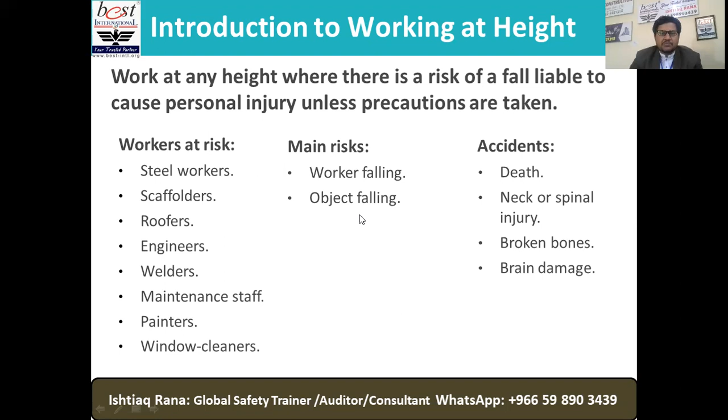Accidents, as I mentioned, the biggest reason of fatalities, like death, neck or spinal injury, broken bones, even brain damage - these are the accidents that could happen because of working at height. We require a very strong prevention and protection system. So vertical distance - falls from any height can cause injury.

Now here, before I discuss further the NEBOSH theory, what's your take on it? If a person is falling from 100 feet and a person is falling from 6 feet, what would be the impact? What do you think would happen to both, the effect of that height? What is your logic - who is going to die as quick as possible, God forbid?

I repeat again: a person falling from 100 feet and a person falling from 6 feet, God forbid, what terrible consequences would there be? Because falls of less than 2 meters can cause death or major injury. As per NEBOSH theories, falls of less than 2 meters can cause death or major injury.

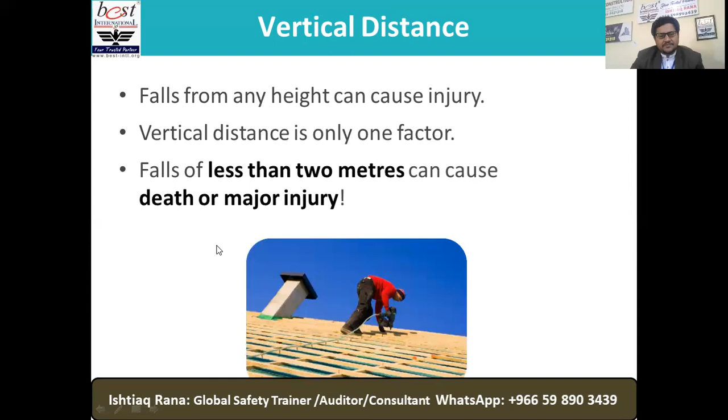Vertical distance is only one factor. Falls of less than 2 meters can cause death or major injury. Several injuries have happened just from a person slipping, falling down, and dying. That means the sudden impact on our body is really hard to bear.

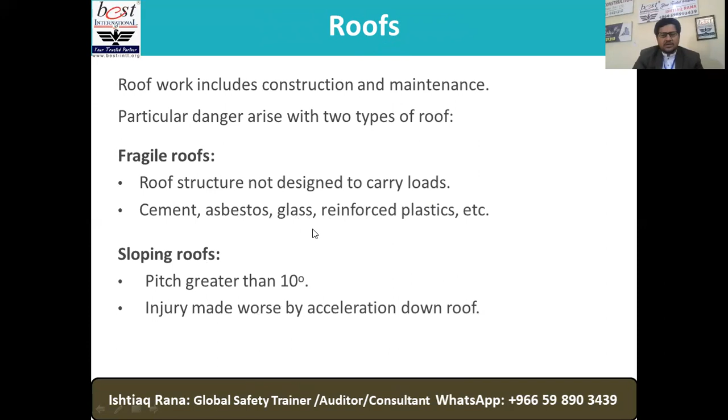Now the roofs. Roof work includes construction and maintenance. Particular danger arises with two types of roof. We have fragile roofs, like a roof structure not designed to carry loads - cement, asbestos, glass, reinforced plastic, etc. And sloping roofs, with a pitch greater than 10 degrees - injury made worse by acceleration down the roof as well.

So fragile roofs and sloping roofs we have. What are the risk factors for working at height? Deterioration of materials, unprotected edges - that is why while we erect scaffolding we have toe boards. Why do we have toe boards? The reason is we don't want any material to fall down, or even a person to slip off the working platform. Unstable access equipment, and also weather - that is why above 65 kilometers per hour, even the scaffolding could be in a danger zone.

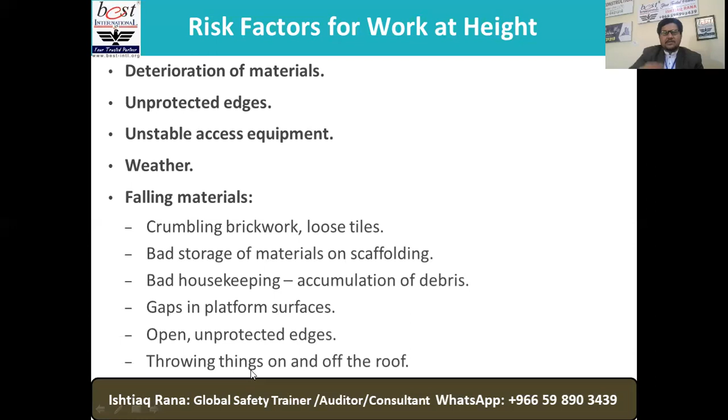Now, falling materials - crumbling brickwork or loose tiles - these are some examples of how materials could fall down. Bad storage of materials on scaffolding, even bad housekeeping - the most neglected area I've noted, especially in the construction industry as an auditor. The accumulation of debris, gaps in platform surfaces, open unprotected edges, and also throwing things on and off the roof. Sometimes you say 'catch it' or just throw it, and it hits someone.

So that is what we have discussed. What are the hazards of working at height for a window cleaner, and what is the most effective way to reduce the risk? Now it's a kind of practical discussion. Imagine you have a window cleaner - discuss what hazards are going to be there, and how you will reduce the risk. What kind of precautions or safety regulations will you implement? A person is working at height as a window cleaner.

What would be the most effective way to reduce the risk? Over to you, please.

Yes, anyone voluntarily, please. Yes, Mr. Muhammad, the worker or an object falling from suspended platform. Assalamu alaikum. Good morning.

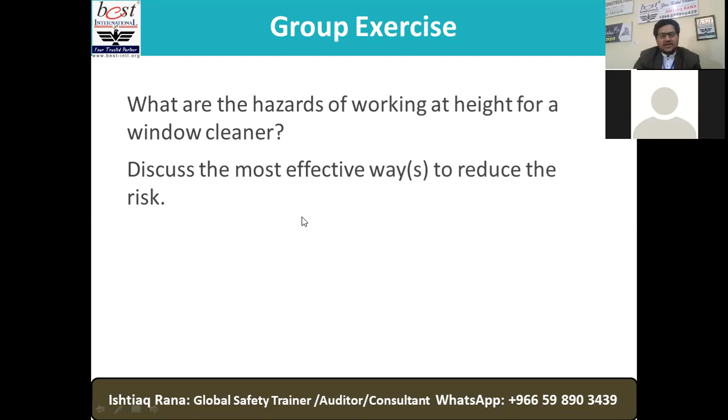And sometimes even the distance between two planks is more than 1 inch, and they have no idea how it could impact. And sometimes the toe boards, the platform, is disturbed because of poor material or poor erection, or not erected by certified competent employees. So several reasons we can highlight.

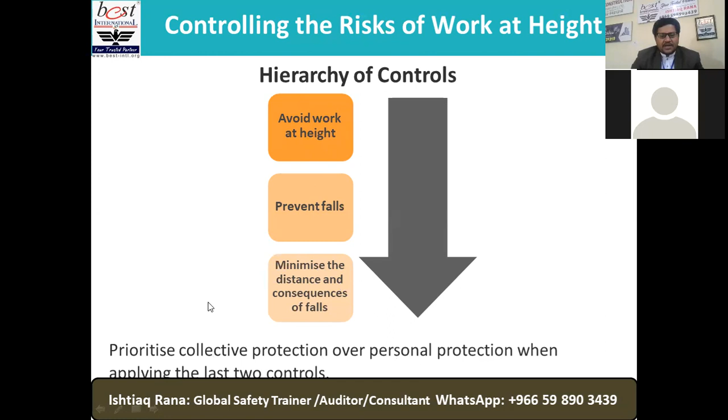Let's see, it's a game of hierarchy of control. First of all, avoid work at height, that would be the best strategy. Prevent falls or minimize the distance and consequences of a fall. Prioritize collective protection over personal protection when applying the last two controls.

Avoiding work at height, what we're going to do is modify the work process, work from the ground level, modify a design like the design of a structure so that steel is assembled at ground level and then lifted into place. It may not be possible to achieve also.

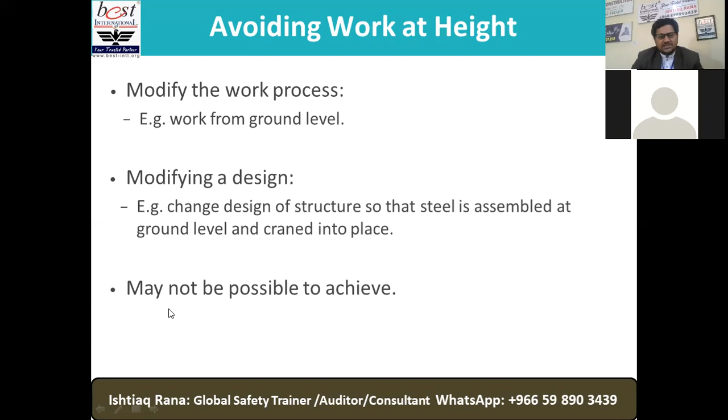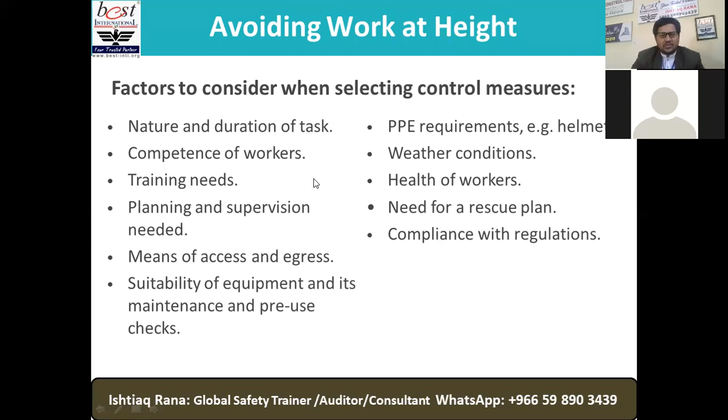So nature and duration of task, competence of worker, training needs, planning and supervision needed, and means of access and egress, and also suitability of equipment and its maintenance and pre-use checks. PPE is a requirement like helmets and weather conditions, health of workers, need for a rescue plan and compliance with regulations. It's not like immediately you're gonna allow someone to start working - a lot of regulations you have to follow.

Preventing falls and falling materials - the best way is proper planning and supervision of work. A poor plan, ineffective plan, incomplete plan, or a plan made by an incompetent planner, things could definitely go in a wrong direction. The probability will go up because your plan is not completed or effective, or maybe not executed the way it should be. So proper planning and supervision of work is important to prevent falls from height and falling materials.

Same way, the people responsible for such work should be experienced and should use their knowledge to ensure the selection and use of correct access equipment. They must be capable, knowledgeable, and experienced to select the correct access equipment and also correct provision and handling of tools and material. Adequate information, training, instructions are still required, even though they are experienced, but project to project, location to location, the nature of environment even would be different.

So we required refresher kind of instruction and training. That is why we have toolbox meetings also - that is another way to give some better insights. You can consider toolbox meetings as a training session as well, but it all depends what exactly you're talking about. It is directly linked to the project or the processes, or you are just talking here and there. So if it is specific to the process, even that toolbox meeting, you can make it effective like a training session.

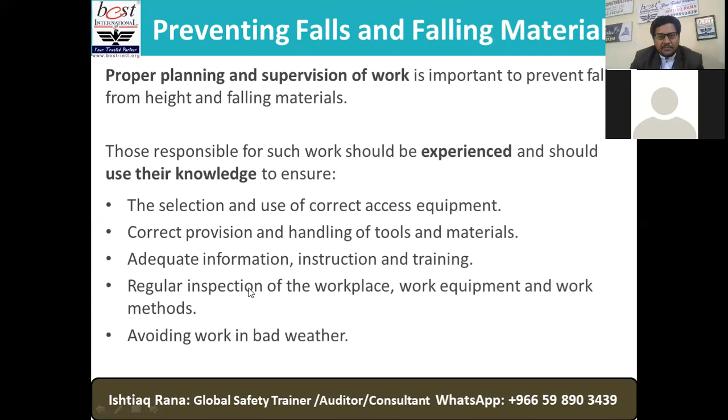Preventing falls and falling materials - look at the picture. Falls hierarchy, you require a safe working platform, properly installed suspended access equipment, and also equipment to arrest falls and falling materials like fit toe boards and brick guards. If risk remains, debris netting and covered walkways can also be used.

Guardrails and toe boards, fully enclosed unprotected edge - these are the toe boards, and also the guardrails. The guardrail, intermediate rail, the height is also important.

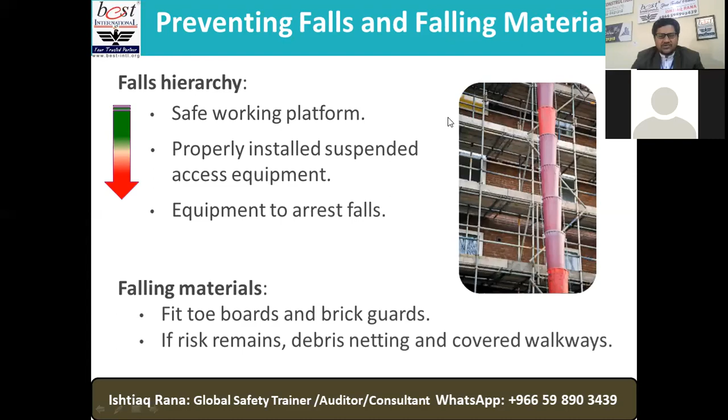Starting from the sill board, sole board, then standard post, and different kinds of materials we use just to complete our good erection of platforms, guardrails and intermediate guardrails and toe boards and working platform using the plans. Everything technically needs to be sound, in line with international standards. Like guardrails - make sure they are fully enclosed, the unprotected edge and robust, securely fixed, high enough, no large gaps. Toe board fitted at edge and brick guards.

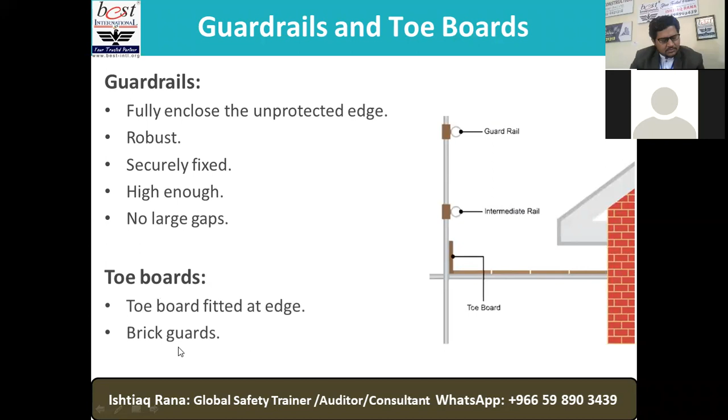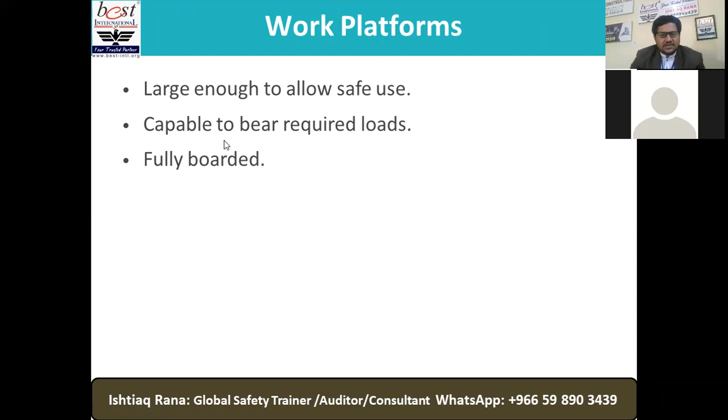Now, work platforms: make sure they are large enough to allow safe use, capable to bear required loads, and fully boarded.

Suspended access equipment, look at the picture also. Fully guarded toe board, and also personal suspended access equipment like boatswain's chairs or light short-term work or similar control to abseiling.

Even though a lot of protection methods are applied, a lot of incidents still happen because there's always a chance of failure, due to bad weather or the person not being in full senses, working 12 hours which is equal to 43,200 seconds.

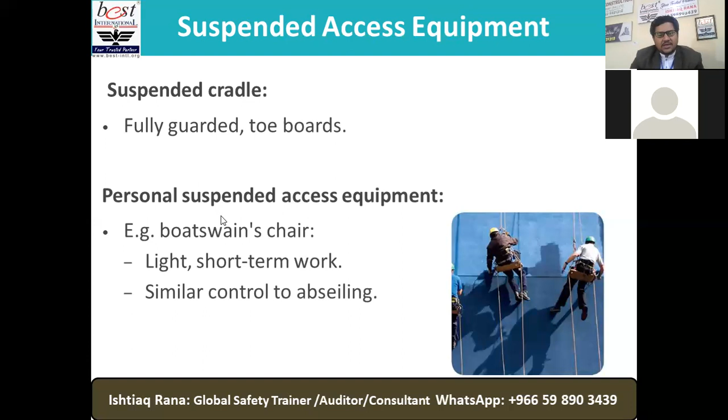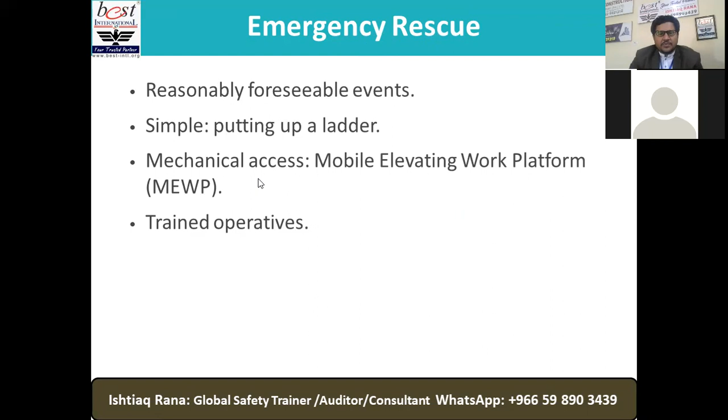And in which second his mind is not focused on the job, we never know. Emergency rescue, reasonably foreseeable events. Simple, putting up a ladder. Mechanical access - we can use mobile elevating work platforms like MEWP, and make sure trained operators or operatives are there.

No doubt, scaffolding erection is done by competent, experienced, and highly skilled employees, but on the other side it is also inspected by the supervisor and the scaffolding inspector as well.

But still, as a safety officer or safety leader, we still have to verify how far the scaffolding is from electrical systems, what is the overall condition of that scaffolding, the material, the angle of the scaffolding, and whether the way it is erected is in line with safety standards.

So what I mean is, sufficient knowledge is still required to verify that nothing will go wrong, God forbid. If there is anything unacceptable, you can easily stop them, and that is your authority also.

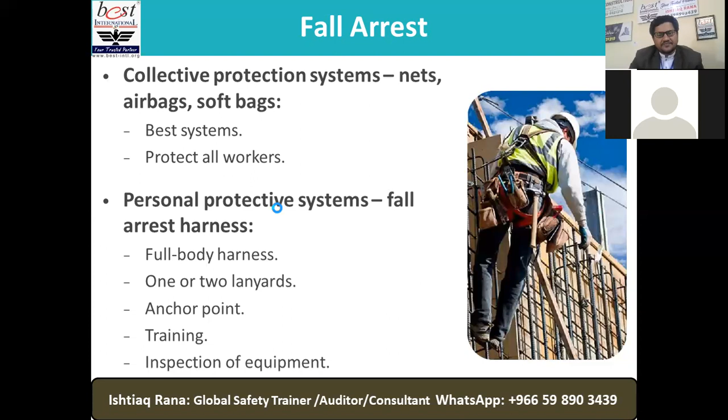Now, provision of equipment, training, and instruction - make sure workers are trained to work at height safely. Some companies call us only for separate working-at-height training, one day or maybe two days, theory as well as practical. So why do they call for separate training?

Because they don't want to see any terrible accident. Some companies call us not to train the welding process itself, like technical training, no - they call us for safe welding, safe welding operation. Some companies, I still remember, called us only for safe forklift operation.

So just the word 'safe' is added - safe abrasive blasting, safe painting, something like that - just to give them some kind of understanding about the safety regulations or rules relevant to that particular process.

So accordingly, I'm sure in Sadara you guys have very deep training programs internally to train your technical staff, because technically they are sound. Like a welder knows really well how to weld, but how to weld safely, or what safety regulations they have to follow - this is our part, to train them properly.

Because we can't be technical in every sort of process. Even if you have safety process engineers, it would still be harder for them to be excellent in each process of the company's operations. But at some level, they can train for the safety regulations of that process.

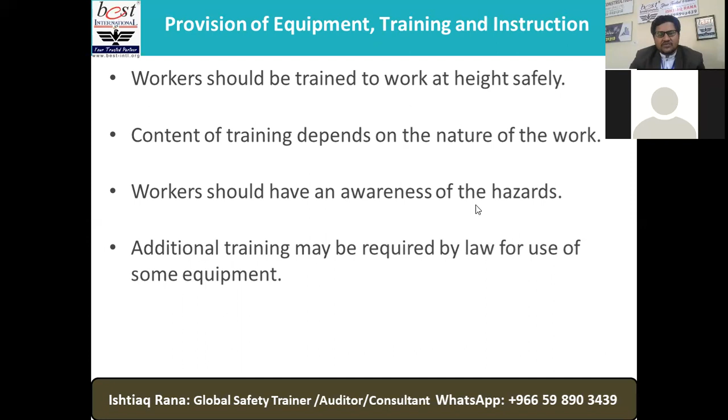That is why the workers should have an awareness of the hazards. Additional training may be required by law for the use of some equipment.

Now, we use ladders for intended short-duration work. The risk again is fall from height - falling off the ladder, the ladder toppling sideways, or the ladder base slipping out because the foot is not secure, or maybe the way he's using that ladder is not good enough.

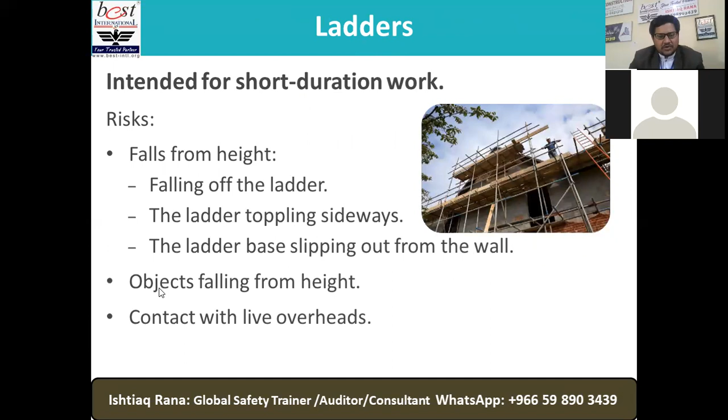The angle of the person climbing up is not good, that is why he's toppling over sideways, or maybe because of environmental hazards like wind speed or vibration. Objects falling from height, contact with live overhead - that is another hazard.

Now suggest the control measures for the safe use of ladders. Let me be more specific here. What is the reason why that extra ladder is there from the top of the roof? What is the purpose of that?

Even though it's a kind of general discussion - suggest the control measures for the safe use of a ladder - but I'm asking specifically why that ladder extends excessively from the rooftop. What is the purpose behind that?

Yes, please. Any one of you? Yeah, Mr. Aftab, you want to say something?

What should be the angle of that ladder? Why is that excessive size there from the top side, why is that extra ladder length important? What is the value of the three points of contact? Why is the person not looking left and right, what is the overall condition of the ladder?

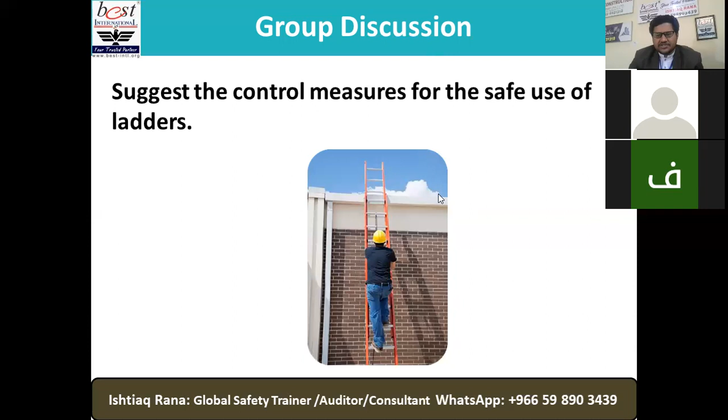There are several controls for ladders, like making sure the site is sited away from live overheads, and a solid flat base, with the angle at 75 degrees. Make sure the weight is supported on the stiles, never on the rungs. Correct angle, like the 1:4 rule and 75 degrees. The top of the ladder needs solid support, and should extend 1 meter from the roof. The ladder should be secured at the top, guy ropes attached, or the ladder should be footed. These are some of the precautions related to ladders.

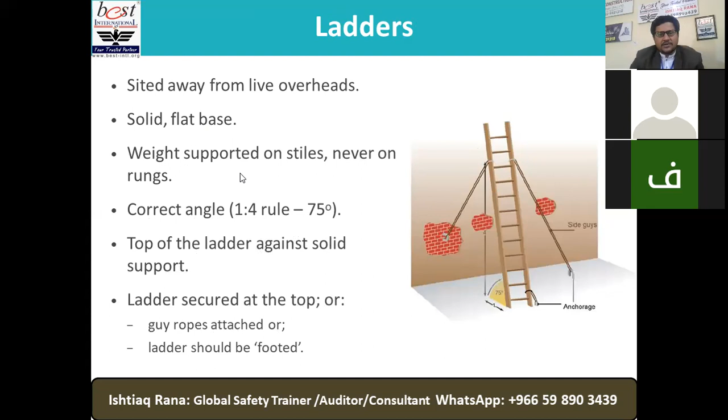Sometimes we take it light. Using a ladder is quite common, it's not a big deal, but still you are going on height, and several incidents happen because of ladders. The top of the ladder should extend 1 meter, like 5 rungs, above the stepping off point if used as a means of access. Only one person on the ladder at one point. These are common things your company already ensures whenever there is working at height. Nothing should be carried in the hands while climbing. Maintain 3 points of contact - this is critically important. Wooden ladders should not be painted.

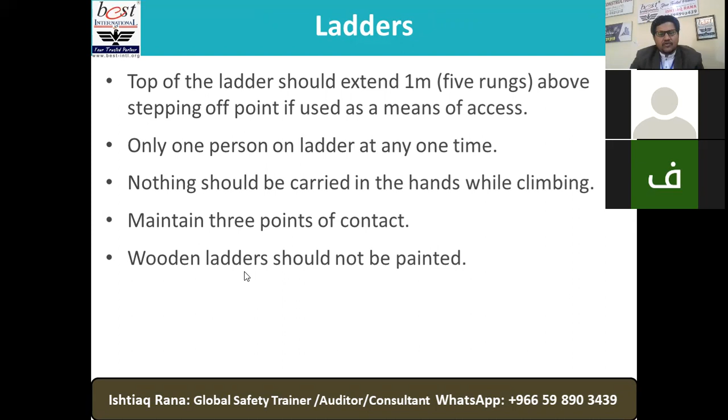Now let's talk about step ladders. This is another kind of equipment, and to be honest, a lot of incidents happen because of step ladders. They're intended for short duration, light work. Precautions required: daily inspections before use, fully open with locking devices in place, on firm level ground. Don't work off the top 2 steps, avoid overreaching, and avoid side-on working.

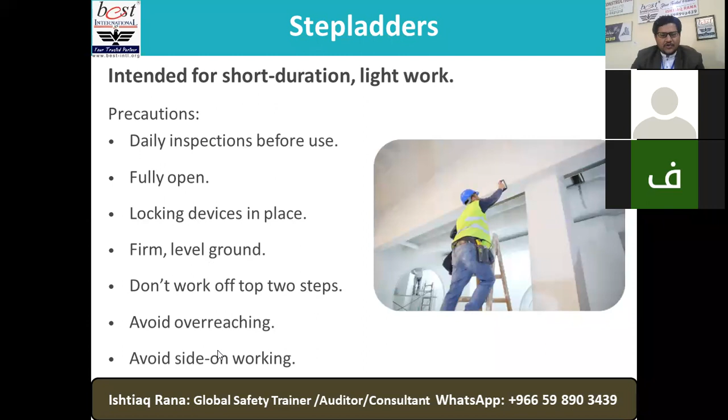We also have trestles and staging boards. Ensure trestles are large enough to allow passage of equipment and materials, free from trip hazards and gaps, fitted with toe boards and handrails, kept clean and tidy, not overloaded, and erected on firm and level ground.

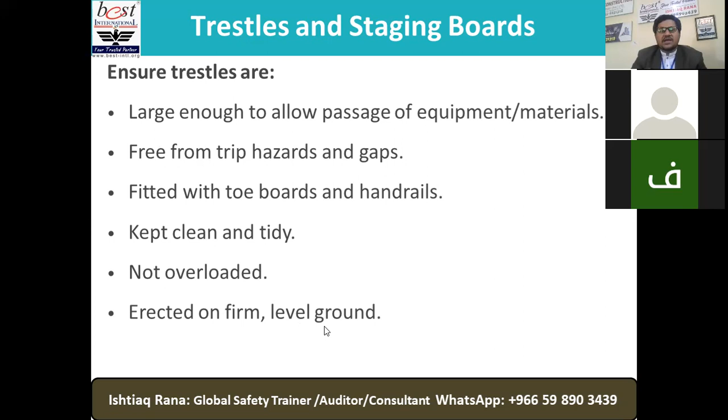So these are the common things whenever we are using different kinds of working at height equipment. We also have independent tied scaffold.

This scaffolding is one of the most red zone areas, especially in Saudi Aramco, and they are looking for plenty of experienced or competent scaffolders, scaffolding supervisors, and inspectors. To be honest, it's a good future in Saudi Aramco - a person who is not very educated can still be trained as a scaffolder, or even as a scaffolding inspector or supervisor at a certain level. There's a huge need, and local Saudis can get into it. Aramco has plenty of projects, and for every project scaffolding is one of the major factors involved, and they always require scaffolding inspectors, supervisors, and even scaffolders, especially the contractors of Saudi Aramco.

Standards are the uprights or vertical tubes, also called posts, and they should be upright at 90 degrees. The ledgers are the horizontal tubes. We have transoms, which are short horizontal tubes spanning across the ledgers, and bracing, which are diagonal tubes. There's a base plate underneath the standards, and a sole board or seal board below that, with the base plate above it. The sole board is timber placed under the base plates.

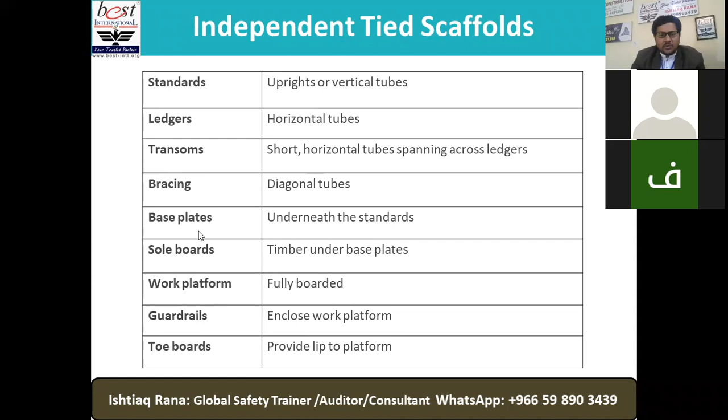The work platform should be fully boarded with guardrails enclosing it, and toe boards provide a lip to the platform. The height of the toe board is critically important, and the distance between two planks is also important to understand. Most importantly, we must select the right material for standards, ledgers, transoms, bracing, base plates, sole boards, working platform guardrails, and toe boards. Looking at the diagram of an independent tied scaffold, we place the sole plate or timber plate, the base plate underneath the standard, then the ledger. The standard is the post, upright at 90 degrees, and the toe board should be a minimum of 4 inches in height.

Look at the top rail, top guardrail or intermediate guardrail, and also through tie to make it stronger, the scaffold board, the transom, and the bracing. So this is just an understanding of how it looks.

Once you are a safety leader going into that area, just have a look. Check whether the scaffolding is exactly at 90 degrees from all four sides, and if any leaning is there, make sure it's not acceptable. Maybe the floor is not leveled, maybe the material is D-shaped, maybe the erection is not done as per safety regulations.

As per OSHA regulations, or the way it should be erected, make sure you as a safety leader check some documentation that it is erected by qualified staff, like their IDs and training records. You can verify if it has a green tag. Who inspected it? Who is the inspector? Is the competent one having an ID? As a safety leader, we can at least verify, even though technically we can't be sound for every sort of process, but we must be capable of verifying the safety regulations related to that particular process. That must be our minimum competence.

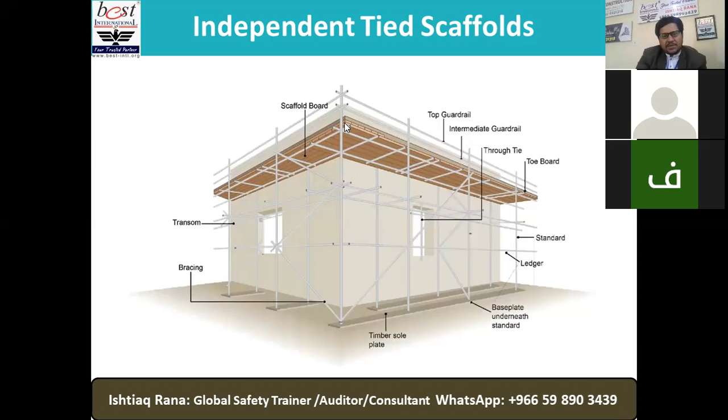Now these are the basic components. We start from the sole board. What should be the width of the sole board, or the length of the sole board, or the height of the sole board? These are some technical areas.

That is why we have separate training for scaffolding supervisors for 3 days, scaffolding inspectors for 1 week, and scaffolding erectors and dismantlers, or scaffolders, for 2 weeks training, with 1 week theoretical and 1 week total practical training, to make them fully competent, inshallah. And we deliver a lot of projects to several brands in Saudi Arabia just for scaffolding.

For this standard, the sole board or seal board height should be minimum 2 inches and the width should be minimum 9 inches. The length could be 6 feet, or if using a small piece, it shouldn't be less than 30 inches. For the base plate, a small piece like 6 by 6, the thickness should be 6 mm, and it should be in a better state. So standard posts and all, you need to select accordingly.

Double check the way they are erecting, that it's all in line with the standard and with the drawings. If you want to be approved as a scaffolder, scaffolding inspector or supervisor, especially from Saudi Aramco, you surely have to understand this, because there is a theoretical exam as well as a practical exam, so they will double check whether you are capable of identifying any technical gaps missed by the erectors while they erected scaffolding.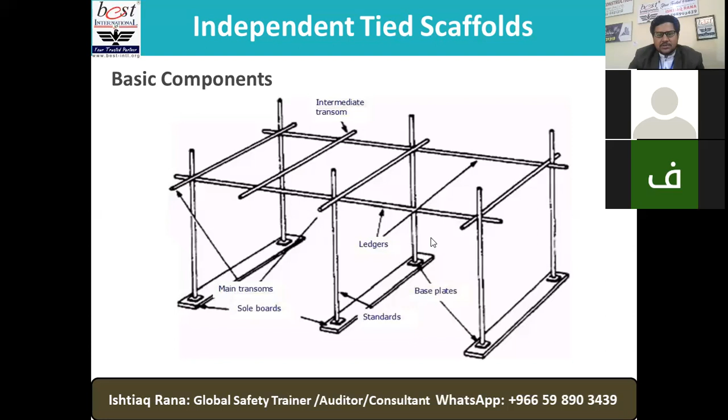Now the bracing is a game of what we call rigidity. Rigidity means stability. The scaffolding would not be stable, especially during environmental conditions or the load we are going to take, or the way we use the platforms. So to avoid any wobbling, vibration or collapse, we require bracing, and bracing always comes from outside of the scaffolding.

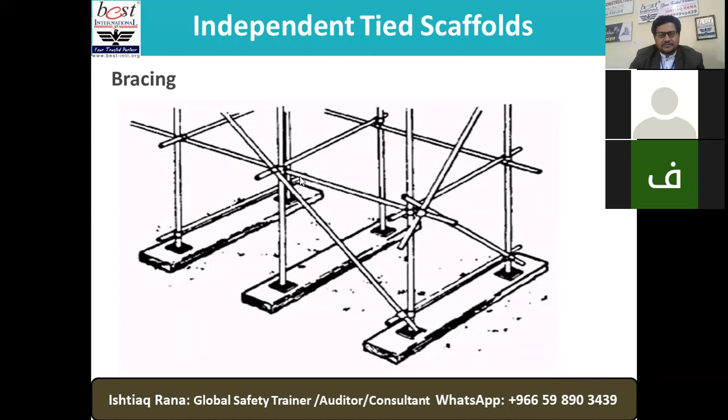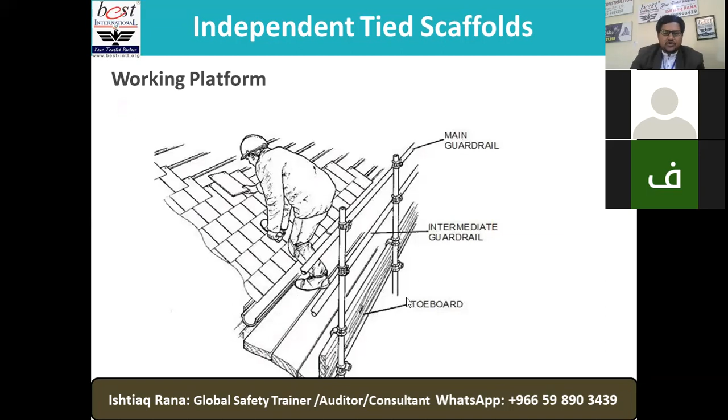Now the working platform: look at, we need a main guardrail, intermediate guardrail, and toe board. The height of the toe board I mentioned should be minimum 4 inches.

This is another way to guide us on how the sole plate looks, or the base plate, then where we put the ledger and the standard, the ledger bracing, the transom, and at the transom we have scaffolding planks, and we put the toe board, but the height of the toe board should be minimum 150 mm, or 4 inches. Intermediate guardrail should have a maximum gap of 470 mm, and the main guardrail approximately 1 meter high. A brick guard should also be there, and we can have some through tie or reveal tie to make it stronger.